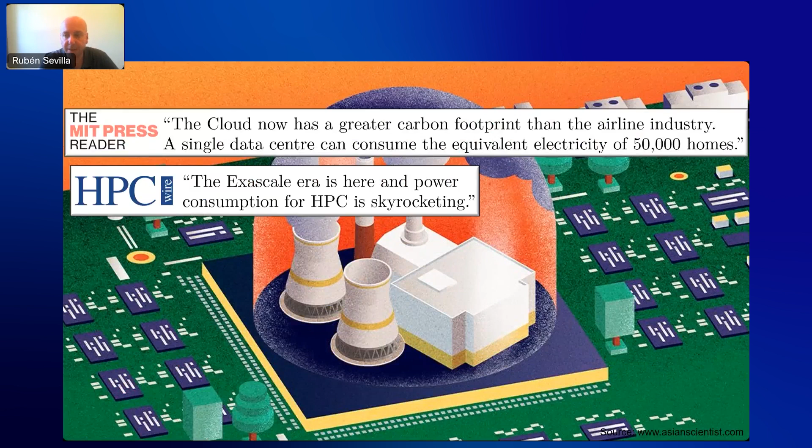Let me start by talking a little bit about the carbon footprint of engineering simulations. There is an increased concern about not just the cloud, but the general use of HPC facilities and its implication in terms of carbon emissions. There are plenty of news stories about this, but I'm going to talk just a few seconds about the last one, on the bottom right.

This is a study made by astronomers who quantified the carbon footprint associated with research activities. What they came up with is this graph showing that offices and the use of large facilities like observatories is surprisingly low. Flights are on top, and there's increasing criticism of organizing too many conferences and traveling to too many places to do research. But actually, by far the most contributing aspect of research is the use of supercomputers.

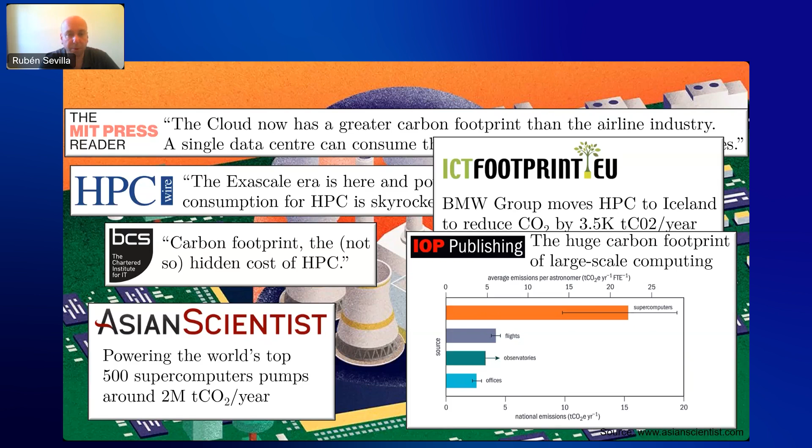If I bring it back to our research, which is focused on using computational fluid dynamics for aircraft design, let's look at this graph representing schematically the flight envelope. To cover that, taking a conservative approach, you would normally run 200 simulations to cover the whole flight envelope. Each of these runs traditionally would use on the order of 100 million elements and take 12 hours using 512 CPU processors. That's just a rough estimate.

It's a rough estimate because 200 runs is really conservative. This is at the very early stages of design. When you look into a geometry, you would naturally go to 1,000 simulations, and this is if we're talking about civilian aircraft. When you go to military aircraft, this number could easily go to 10,000 simulations.

So if we quantify, being conservative, 200 runs with this number of elements using this computing architecture, that equates to 1.7 tons of carbon emissions to perform these simulations. To put it in a different figure, that's equivalent to 15 megawatt-hours, or almost 10,000 kilometers in a passenger car.

And if the situation is not bad enough looking at these numbers, when you read the famous CFD vision report by NASA, one of the statements is that in 2030 we expect simulations with 20 billion elements to be commonplace. So if you do these numbers again, to perform 200 runs we're talking about 150 tons of carbon emission, equivalent to going 20 times around the world in a passenger car.

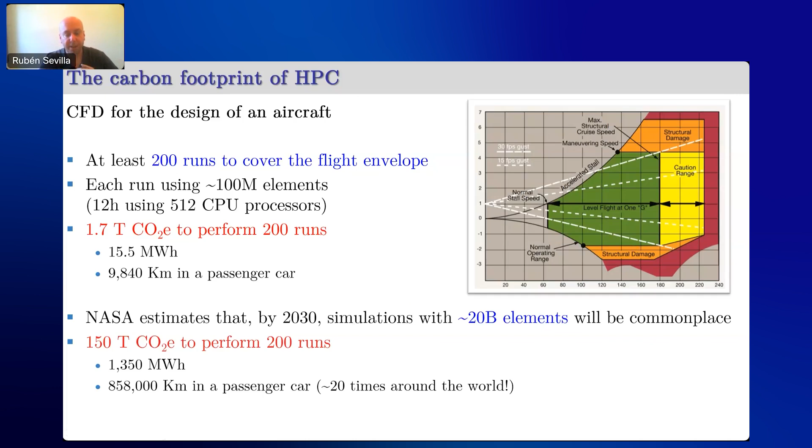That gives you an idea of the cost of simulations. One reason for this high cost and environmental impact of using HPC is the way things are done in many industries, aerospace in particular, because they need to perform parametric analysis. For a given geometry, they run many cases, varying angle of attack, Mach number. They don't want to do meshes for each case, so they end up using a fixed mesh approach, meshing with almost uniform spacing around the aerodynamic object, just so they can run all simulations with the same mesh without needing human intervention, which is the most time-consuming part.

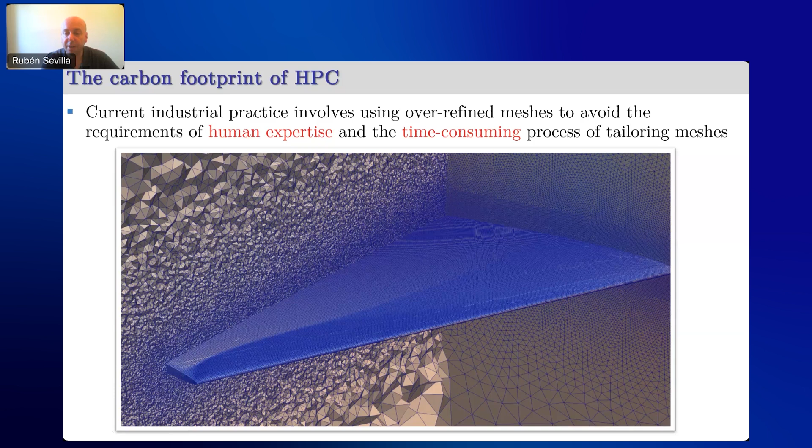Ideally, for different configurations, different Mach numbers and angles of attack, you would use meshes tailored for that simulation, making efficient use of computational resources. But at the moment they don't do it because it requires intensive human intervention, and that's the most expensive part for them, the time of a human.

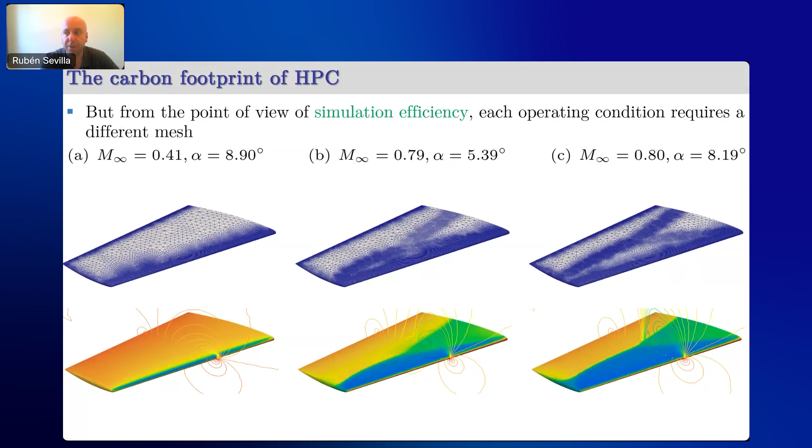So the idea of our research, and this is the outline of the talk, is to try to predict with neural networks what would be the near optimal spacing. We're not going to be too ambitious and call it optimal - I don't think we can call it optimal, but we can call it near optimal. It's going to be a very good mesh to start with for a new simulation, only refining what is needed.

Let me start with this part, then I'll present the second part, how we extend all of that for transient problems - thinking on higher order methods and degree adaptation using neural networks. These will be the two main blocks.

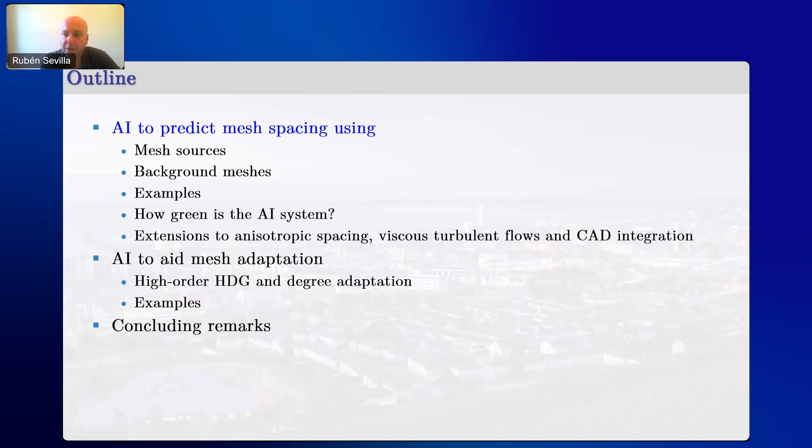So let's go for the first one. This is the typical design cycle. You have operating conditions and a given geometry, and if you want to do things efficiently, you spend a lot of time defining your spacing function. After that, you generate your mesh, perform your simulation, and assess the accuracy of your solution. If it's suitable accuracy, you finish. If not, you need to go redefine your spacing function and generate the mesh again.

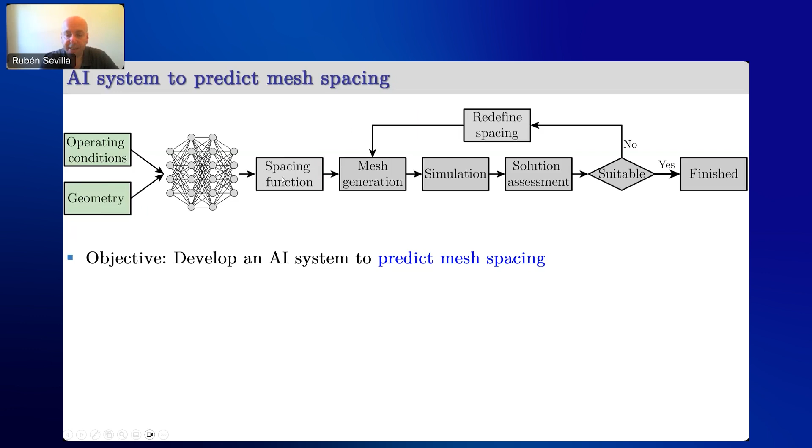Our idea is simply to insert in the middle here a neural network that learns from existing data and is able to predict the spacing function so it's no longer a bottleneck in terms of time and human hours invested in this process. Hopefully what we're aiming to achieve is also to reduce the number of iterations in this cycle.

So basically we aim to produce a mesh that's good enough to obtain the accuracy you need. We're aiming to increase the speed of automation, accelerate mesh-independent studies, overall with the aim of speeding up a design process, and we're also thinking about reducing the carbon footprint of current simulations in the industry.

And finally, as you probably know, mesh generation and preparation of models for simulation is normally said to be the bottleneck in the whole simulation pipeline. But despite that, there's a lot more investment and a lot more people working on the development of solvers and new methodologies for solving partial differential equations, and very few people dedicated to mesh generation aspects, geometric defeaturing, cleaning, and so on.

So basically what we're aiming to do here is to embed into this artificial intelligence system some of the previous knowledge of experts who have been generating meshes for particular simulations. All this data at the moment is really not used.

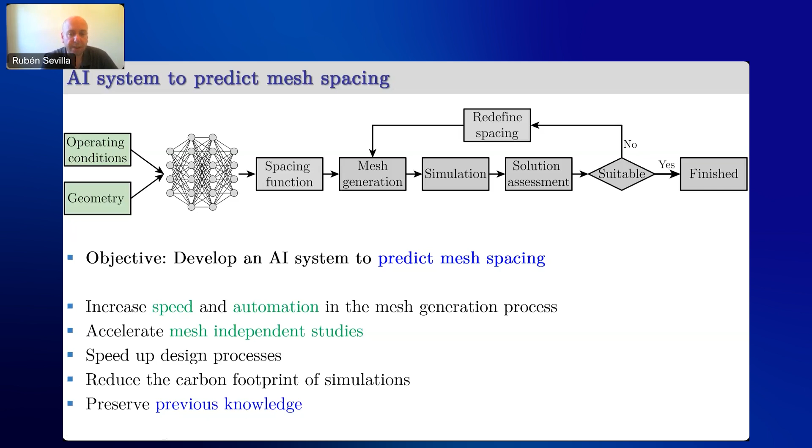So the first thing I'd like to cover is, if we are aiming to predict the spacing, how is the spacing normally defined? There are two ways, traditionally. They are not disjoint, so they could be used together.

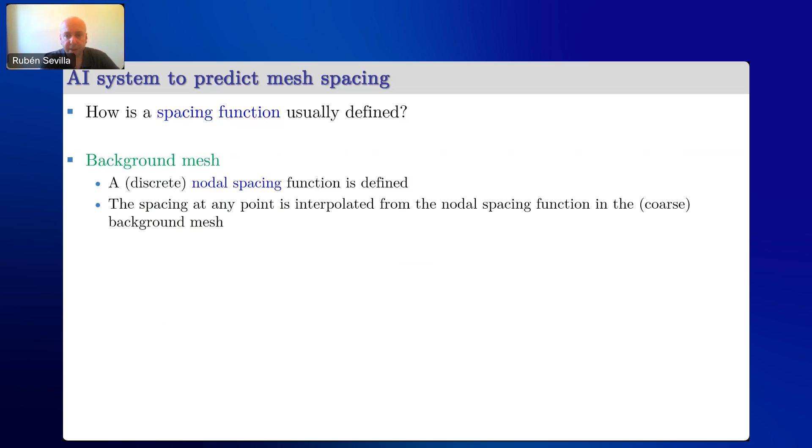The first one is we could use a background mesh, which is a way to define a discrete nodal spacing function. We create a very coarse mesh. This mesh is completely automatic. It's not refined everywhere, it could be uniform, could be structured, could be anything. Then we define a function that gives you a nodal value at each node of this coarse background mesh.

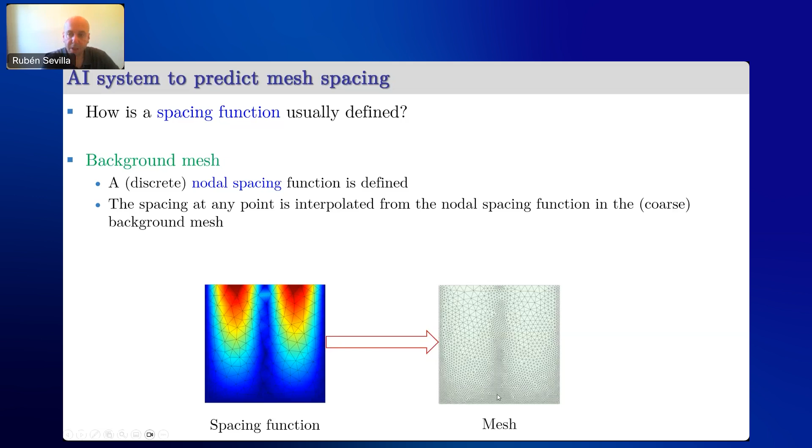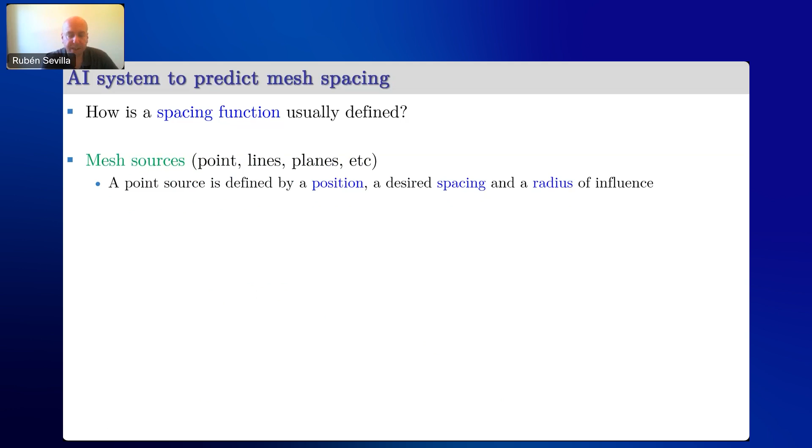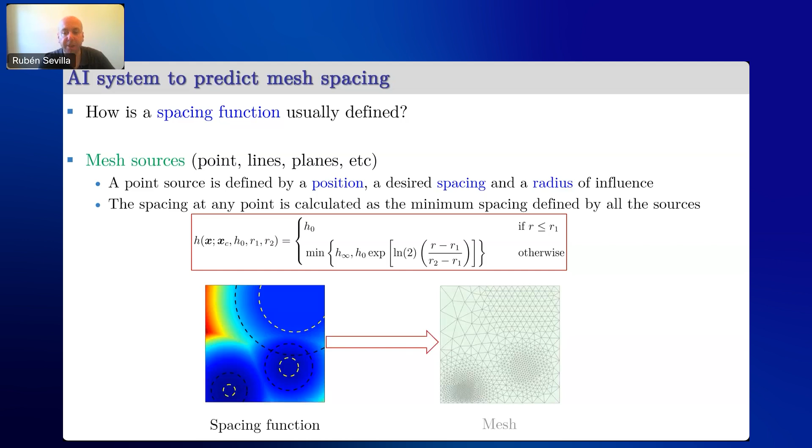So this is all very good, but the problem is that handling mesh sources, or a background mesh, in 3 dimensions, and specifying the spacing at every location, is time consuming. This is where, at the moment, there is a lot of investment of human hours.

Imagine this case with mesh sources: you need an expert engineer taking decisions on where to place the sources, what spacing to use, what radius of influence to use, etc. This is why companies are heavily relying on expensive simulations with a fixed grid that captures all the features, with the unnecessary computational cost.

So I'm going to present two systems, two neural networks that we've designed. The first one predicts the spacing on a background mesh, and the second predicts the sources. I'll take the first one.

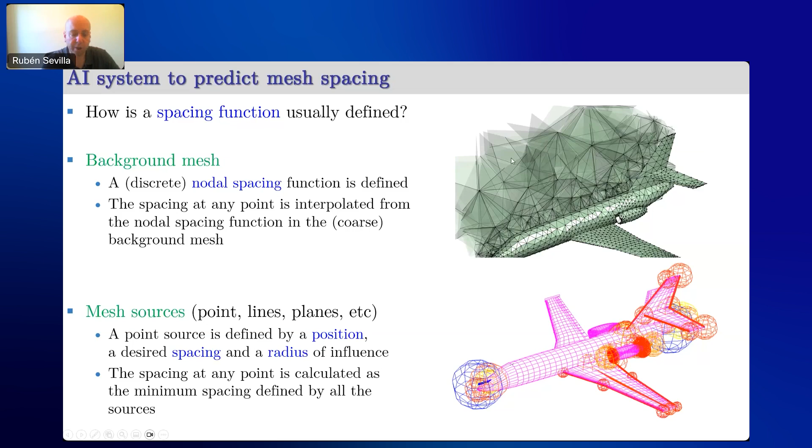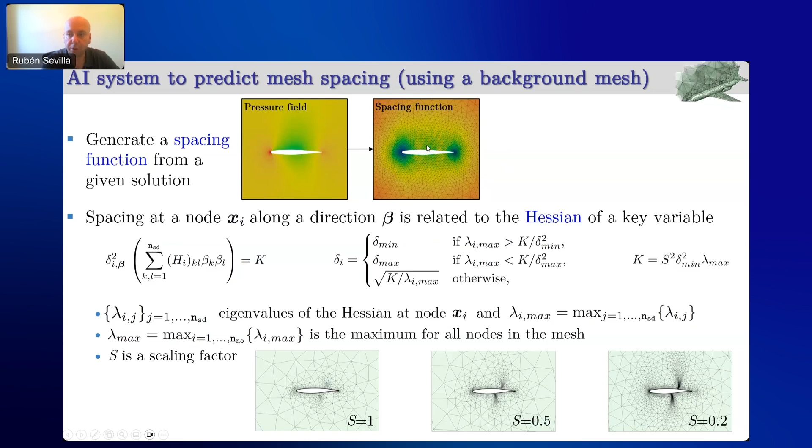We'll repeat the process for all the training cases that we have available, all the different pressure fields that you can see here. It could be for different flow conditions. It could be for different geometries. We've done both, and I will share examples on both.

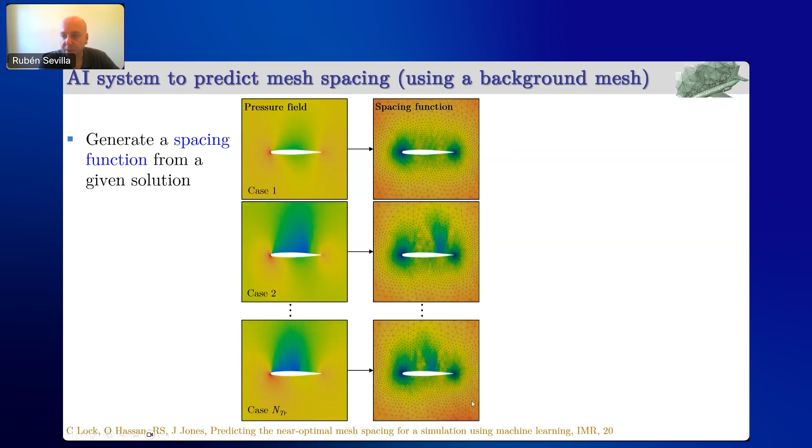After translating this to a spacing function, if we want to use a traditional feed-forward neural network, we need the output layer to have a constant number of neurons. So in this case, this is not still there yet because these simulations could have been done in different meshes. So what we do is we define a background mesh, which is a coarse mesh with no specific refinement anywhere, and we are going to interpolate the spacing function for each case into the common background mesh.

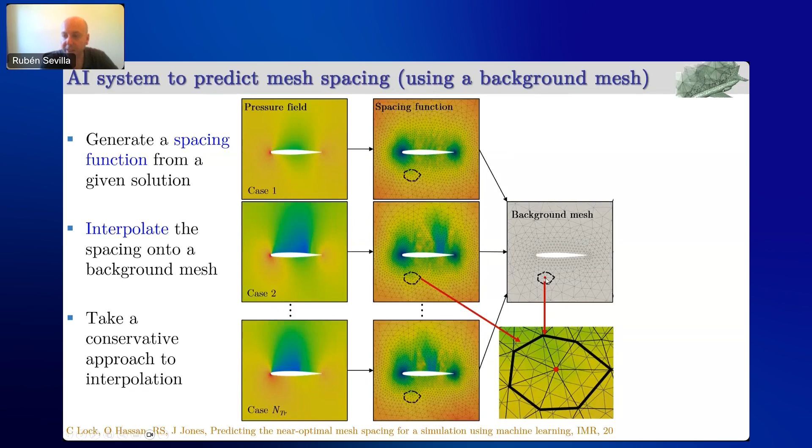And the interpolation we do is basically what we call a conservative interpolation. Basically, you take a point on the background mesh, you take the patch of elements surrounding this node, and then you project this patch into one of the simulation meshes, one of the computational meshes you have. And you take the minimum spacing of all the nodes inside this patch, and you associate it to the node of the background mesh. This basically allows you to represent the spacing in this common mesh.

That's interpolated the spacing for each one of the cases. One of the things that is worth noticing here is that you see how the spacing is actually smooth. So for example, all this area of small spacing in here, which is necessary to capture the shock, is actually expanded a little bit. And this actually is acting as a safety factor. This allows you to make sure that when you do the predictions, you are not going to miss any feature.

And at the same time, we're using a background mesh, which is coarse. This is going to reduce the number of outputs required in the neural network. So it's going to speed up the training.

So the architecture is really simple. It's a feed-forward neural network. The input layer is basically the flow conditions, so Mach number and angle of attack, and geometric parameters. And the outputs are the spacing at each one of the nodes of your background mesh.

Needless to say that if you are considering different geometries, you will need a mesh morphing algorithm in order to morph the background mesh into each one of the configurations. This, I believe, is quite standard.

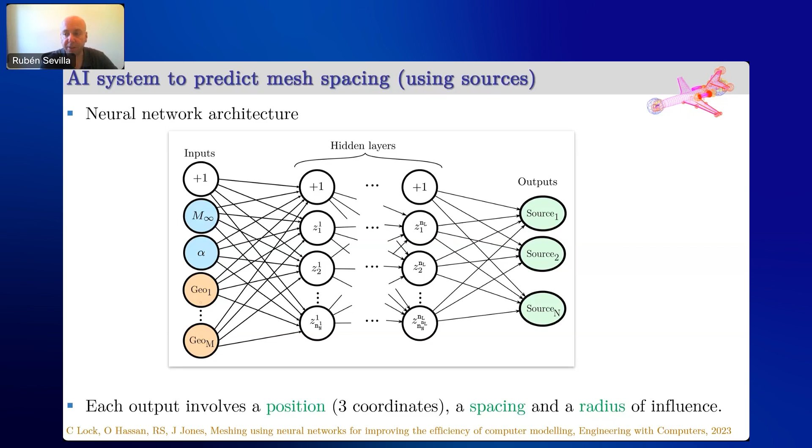Now, once you have it, the architecture is fairly simple. The input layer is the same, flow conditions and geometric configurations, and the output is now the characteristics of each one of the sources. Notice that per source, you have 3 coordinates in 3D, 1 spacing, and 1 radius of influence, so that's 5 outputs multiplied by the number of sources.

Okay, now how does this work? Once you've trained the neural network, it takes unseen cases, whether flow conditions or geometry, and I use my trained neural network to give you the set of sources. You could directly use this set of sources in the mesh generator, but we know by construction that there will be many sources that are redundant.

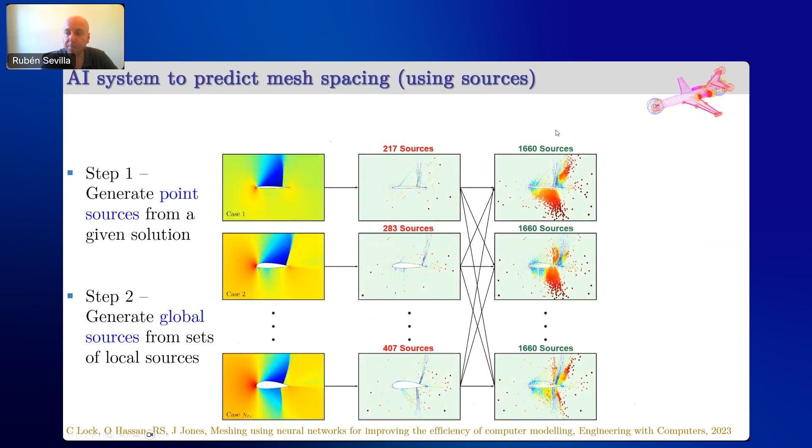If I take you back to this case, you could see that all these cases had only a few hundred sources required per case, but in order to make it consistent I took it up to 1,600. So one thing we do, only to speed up the mesh generator, is remove the redundant sources — any source that can be removed without altering the spacing. After that, you're ready to generate your mesh and perform your simulation without having to manually insert all these sources. So let me show you an example.

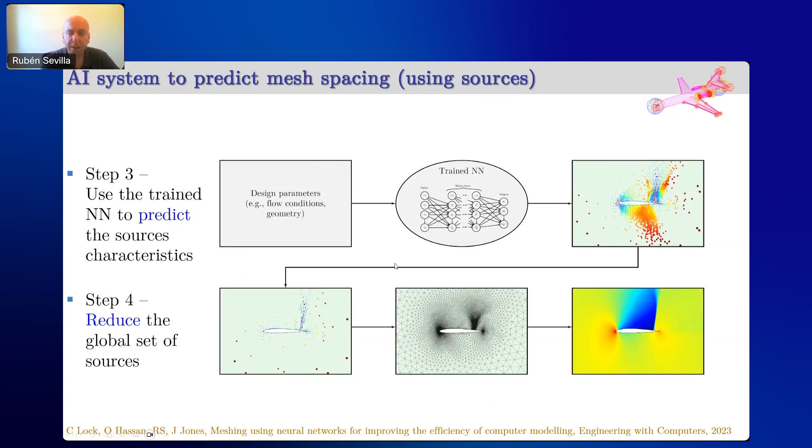I'm going to take this 3-dimensional wing with variable flow conditions. This is parameterized with a Mach number going from 0.3 to 0.9, covering the subsonic and transonic regime. The angle of attack ranges from 0 to 12, with an inviscid solution for the moment, inviscid compressible Euler equations.

We're going to increase the number of training cases from 10 to 160, and use 100 test cases unseen by the network to test accuracy. We have no idea what number of hidden layers or neurons to use, so we're going to do a brute force grid search, running hidden layers from 1 to 6 and neurons from 25 to 250.

I'm going to show you results for the two neural network architectures. One uses sources — in this case, of the order of 20,000 point sources. Remember, you need to multiply this by 5 to know the number of outputs of your neural network, since each source has 3 coordinates, a spacing, and a radius. So we're talking about a neural network with 100,000 outputs here.

With the background mesh, the size is substantially reduced, so this is promising — we use a mesh with only 14,000 nodes, and you only need to predict 1 scalar per node of the mesh, which is just the spacing in the background mesh.

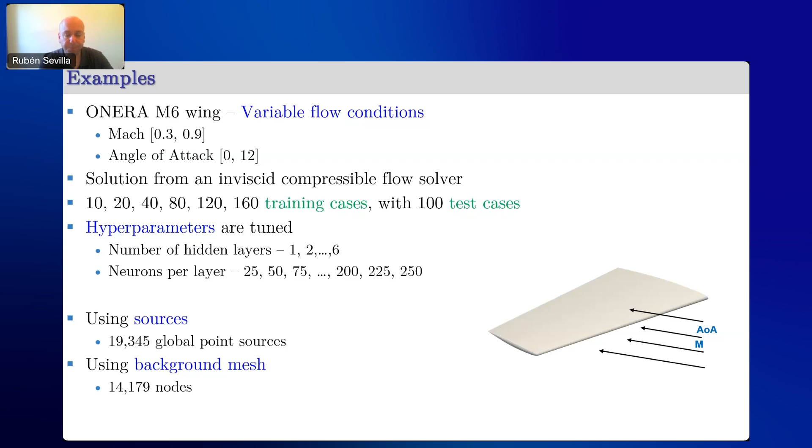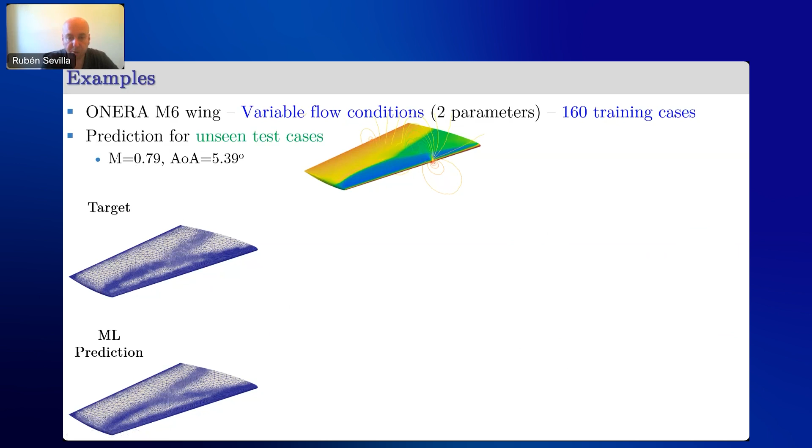But then if we try to quantify, basically what we are going to do is go to every point in your mesh, and measure the ratio between the predicted spacing and the target spacing.

And we are using quite a lot of training cases, I would say, 160 training cases for this. Now, several comments here. Number one, 5% of the target, when we're talking about mesh generation, is really unnecessary, okay?

When you think that a mesh generator, when you ask for a given spacing, imagine that you ask for a spacing of 1, it will give you a spacing of 1.2, 1.3 easily, because sometimes you have no other way of closing the spacing, or it will give you 0.9, 0.8, 0.7. What is the threshold that normally you need to consider as acceptable when you ask for a mesh? Well, if you're asking for a spacing of 1, you need to accept up to square root of 2 normally. This is the magic number that mesh generators use.

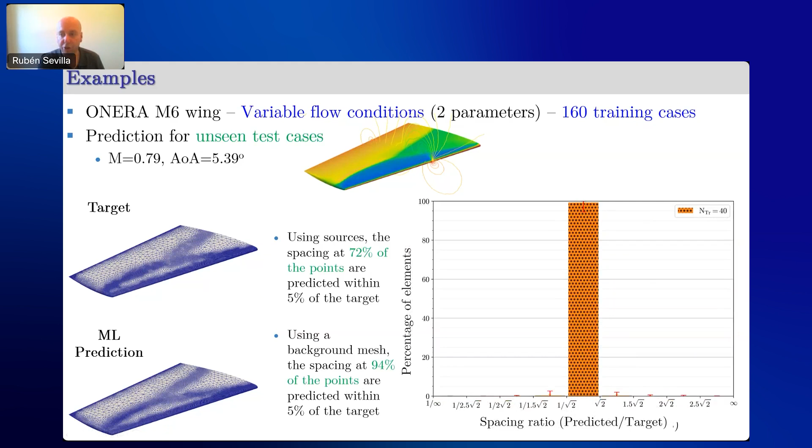Now, another thing we did is to actually use the meshes that are predicted by the neural network in order to perform a simulation and see how accurate the results are.

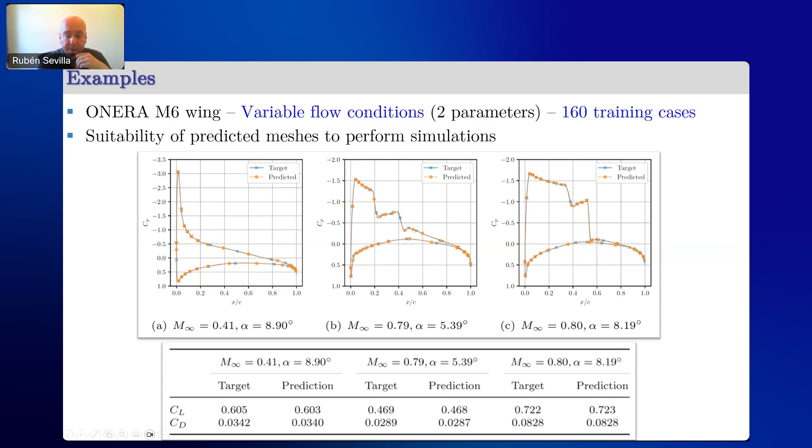Right, more complicated examples include geometry. We've been talking so far about flow conditions, only 2 parameters. When you start considering variable geometry, then the number of parameters really goes high. So here I'm going to consider this full aircraft configuration.

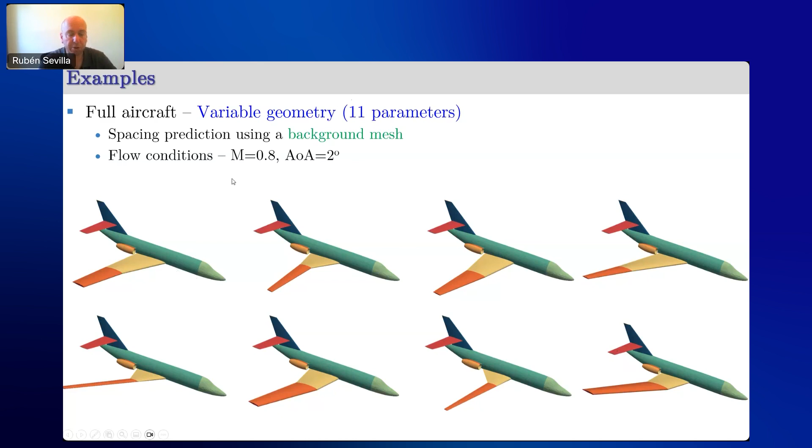With 11 geometric parameters, this figure basically gives you an idea of what variation is induced by these geometric parameters. I'm going to consider transonic flow conditions, so all the solutions are going to exhibit shocks.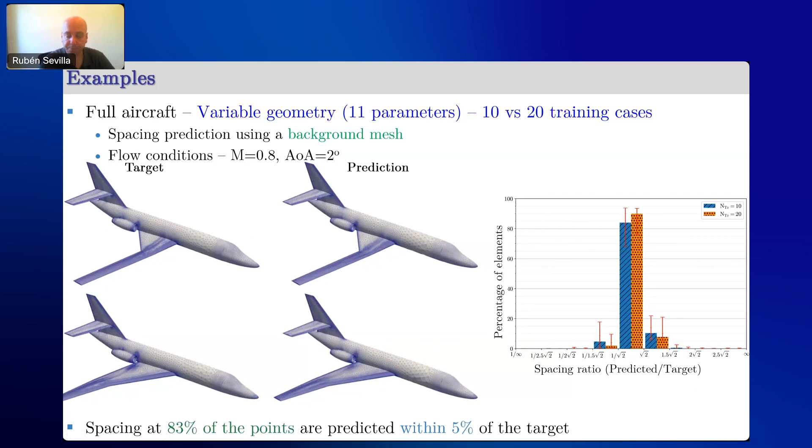Now let me talk about part of the title, the green AI part. Our objective was to increase efficiency compared to current industrial practice, which is to use a fixed mesh and run all simulations on the same mesh to avoid having a human decide where to refine for each case.

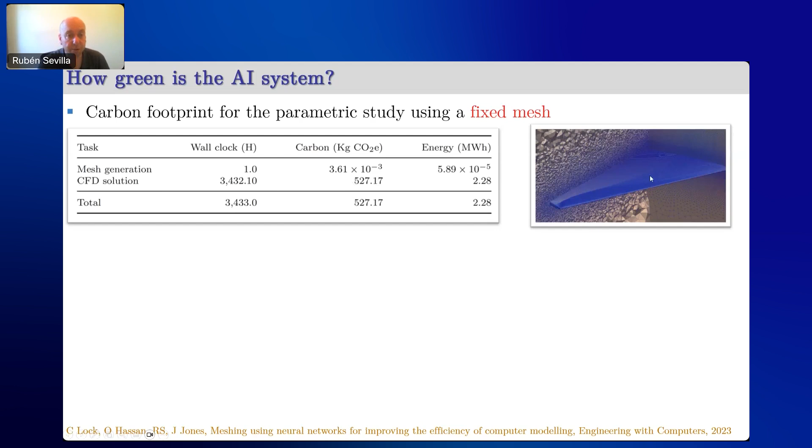With this approach, in terms of mesh generation you spend nothing, just 1 hour to generate the mesh, which had on the order of 40 million elements, but you do that once. The problem is that the CFD simulations you perform become very expensive, over 3,000 hours, with half a ton of carbon emissions to perform this parametric study on this geometry.

Now if we quantify our approach, you'll observe that in mesh generation you spend more time, obviously, because for each simulation, for each flow condition, you need to generate a new mesh. This goes up to 24 hours for mesh generation. But the big advantage is that your simulations become way cheaper, because you have a mesh tailored for that geometry, reducing time and carbon emissions substantially. Now the question is, can we call this green AI?

It's certainly AI because we are using neural networks, and the answer is yes. The definition of green AI is that you improve and reduce the computational resources and carbon emissions caused by HPC use, if you account for training and tuning. This is something that is very often hidden, and I don't think we should hide this information. We should include it in this table.

Here I'm including all the time we spend training, but also tuning, meaning running different numbers of neurons, different numbers of layers, and even repeating the training to remove the influence of the initialization of the weights of the neural network. All of that is included. I'm not surprised that the time of tuning and training becomes dominant, and I think this is why in many cases this time is hidden, because if you're not careful, it becomes the dominant cost of your process.

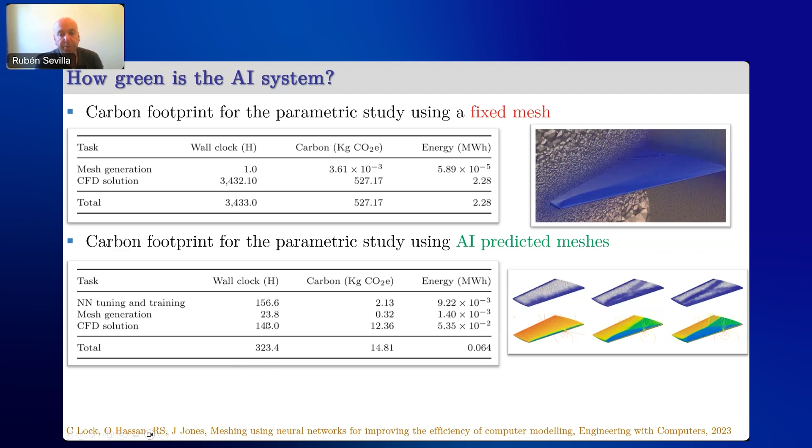The good news is that the resources needed for training our neural networks are relatively small, so the carbon emissions associated with tuning and training are very low. By reducing the CFD hours substantially, which use parallel processing and so on, we reduce the carbon footprint substantially. The overall conclusion is that we can reduce carbon emissions compared to current industrial practice by a factor of 35, which is quite impressive in my opinion.

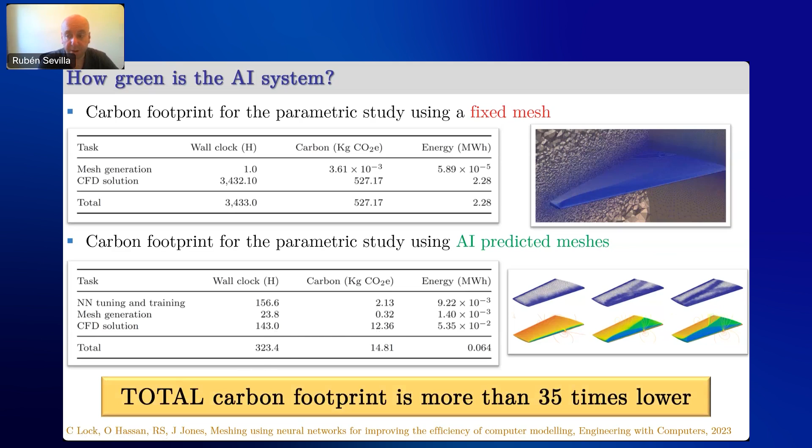Now, the next thing we've done is try to extend this to anisotropic spacing. So far I've been showing you isotropic spacing; we wanted to extend it to anisotropic, to capture directionality in a more efficient manner.

Because when you look at these solutions, there are clearly directions along the shock where the pressure is really not changing in this direction, but it's changing massively in the transversal direction. So the optimal use of your discretization will be to stretch the elements along the shock in order to minimize the number of elements whilst capturing the high gradients.

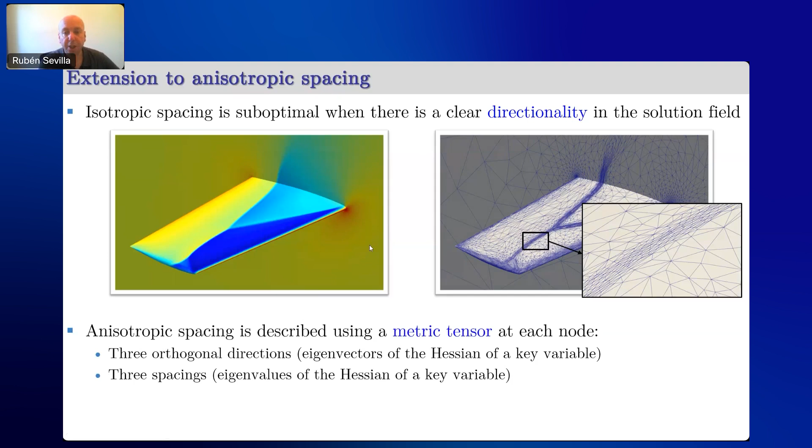So the idea is to extend our approach to predict a metric tensor, because this is how you describe anisotropic spacing. You need 3 orthogonal directions, and you need 3 spacings in each one of these directions. So the strategy we followed: you could say if you need to predict 3 directions, these are 3 vectors with 3 components, so 3 by 3 is 9 in total, plus 3 spacings, that's a total of 12 outputs that you need to predict per point.

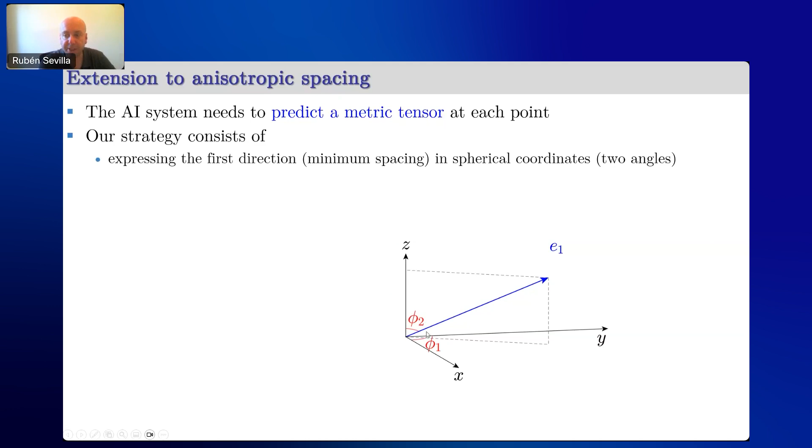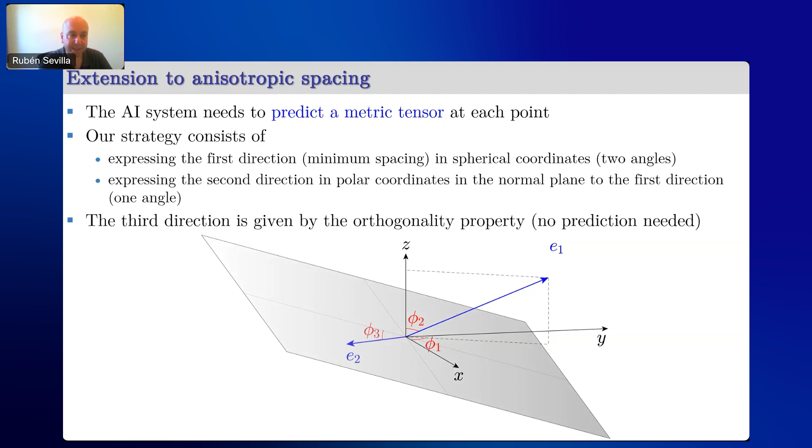But it's actually not true, you can do a bit better. What we do is look at the first direction, the one of minimum spacing, and express it in spherical coordinates, which means we need only 2 angles to represent that direction. Then we use orthogonality. We know the second direction is going to be in an orthogonal plane to vector E1, the first direction, so it's going to be somewhere in that plane. Again we don't need the components of the vector, we can use polar coordinates on this perpendicular plane. And the third direction, you don't need to predict at all, because if it has to be orthogonal to these 2 vectors, it's already given. So effectively, you only need to predict 3 angles and 3 spacings in order to enhance our system to predict anisotropy.

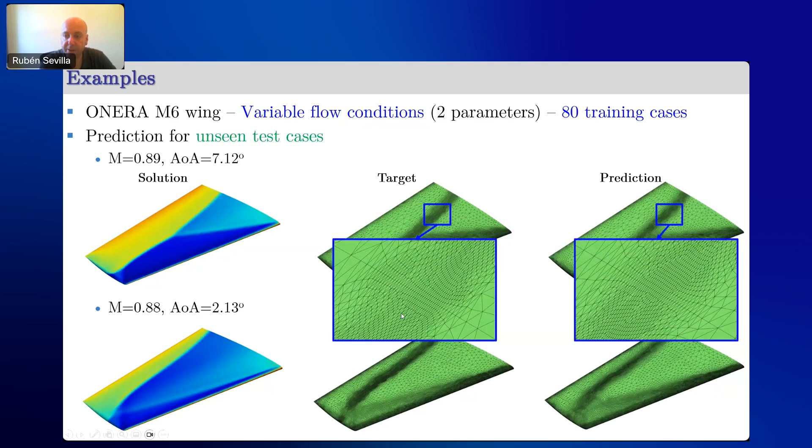So you're going to need more cases. We have 2 unseen cases: the solution on the left, the center is the target mesh, and the right is the prediction, which visually does a good job. If you zoom in, you can see it's really stretched, okay, so you are producing an anisotropic spacing here.

A similar graph to quantify the accuracy. With 80 training cases, we are almost predicting all the nodes perfectly. This is the first spacing, the spacing in the direction where it is minimum, referred to the shock. Then the second and third spacing are all well above 90, almost reaching 100%.

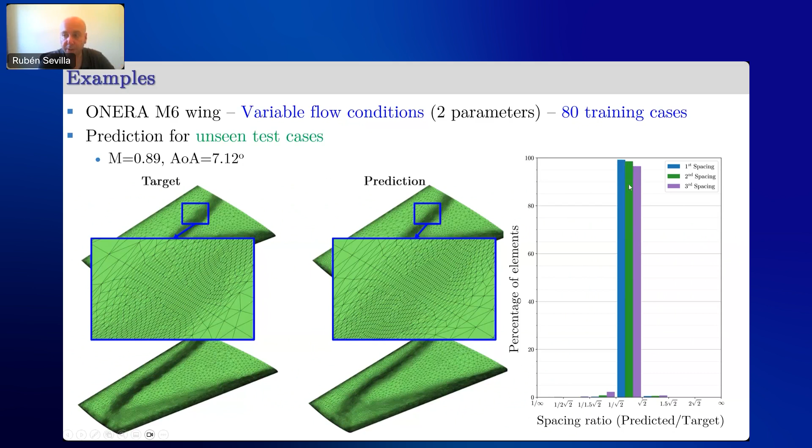For a more complicated case, going back to the full aircraft configuration with 11 geometric parameters and only using 40 training cases. I'm showing results with the minimum number of training cases possible, what accuracy you can achieve. Here you can see again that we're well above 90 for the most important spacing. We consider the first one the most important because it's linked to how accurately you can capture the shock, and it's also doing reasonably well in the other directions.

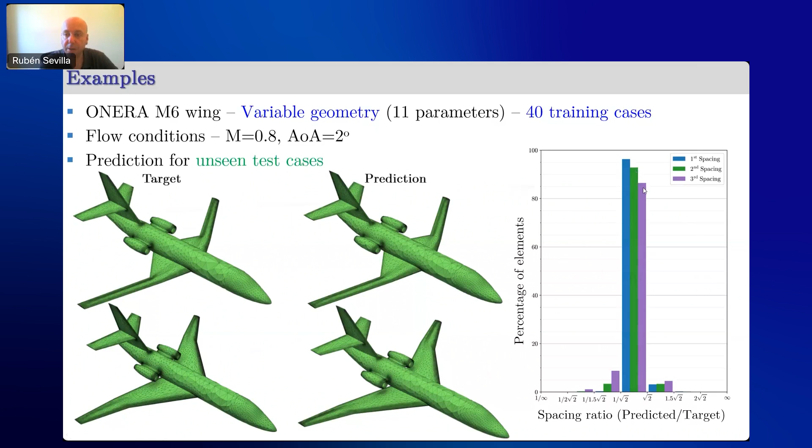Now, all of that I'm going to move on from, because all of that was done for inviscid flows. We've played a little bit with viscous and turbulent flows, but in 2 dimensions. This is basically the work of an MSc student who spent 1 year with us. We found a few challenges, I'm not going to lie, and I'm going to present them here along with the solutions we found. But all the challenges are really induced by the use of highly stretched elements in computations related to turbulent and viscous flows, so boundary layers, shear layers, and so on.

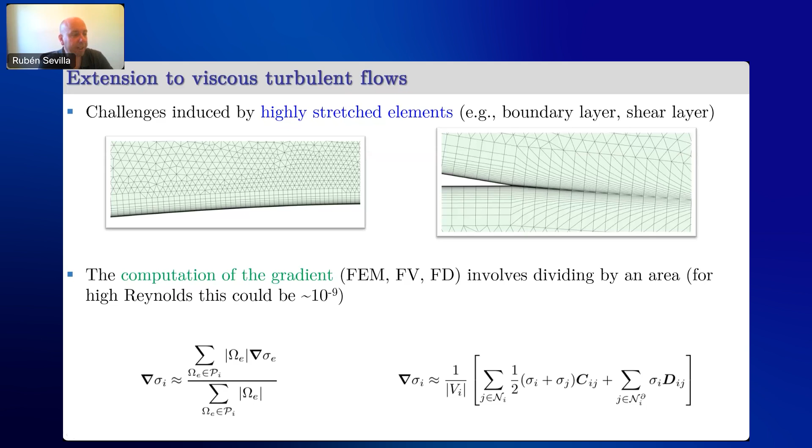All the challenges come from the fact that we need to compute the Hessian in order to compute the spacing function we're trying to predict, which means we need to reconstruct gradients. When you look at the computation of a gradient, it could be done in different ways, a finite element approach, a finite volume, but no matter what you do, you're going to end up dividing by the area of an element in 2 dimensions. At these areas, on the boundary layer or shear layers, you're going to be handling elements with an area on the order of 10 to the minus 9. So any minor issue, any minor inaccuracy in your solution is going to give you trouble. So take one case, the typical case on the NASA website, RAE2822, transonic turbulent flow.

And you look at the pressure distribution. Overall, from a certain distance, everything looks okay, no major issues in here. But then if you start zooming, and you need to zoom a lot, this is a zoom near the lower surface, very close to the leading edge. And when I say you need to zoom a lot, we're talking about 10 to the minus 3 as the scale you see in this figure, and the chord length of the wing is 1.

What we saw with our code and simulations is small oscillations in the last layer of elements. These are the contours of the pressure. Initially, we thought it could be something wrong with our code. We downloaded the solution from the NASA website, and we saw even bigger oscillations. So basically this is telling me that the solution within the boundary layer is not fully converged. You cannot fully converge it. You get tiny, tiny, tiny oscillations which don't have an effect on lift and drag. You don't see anything in there. You get good answers, good comparison with experimental values. This is what everybody's reporting. These oscillations are really, really tiny, I insist, even on the scale.

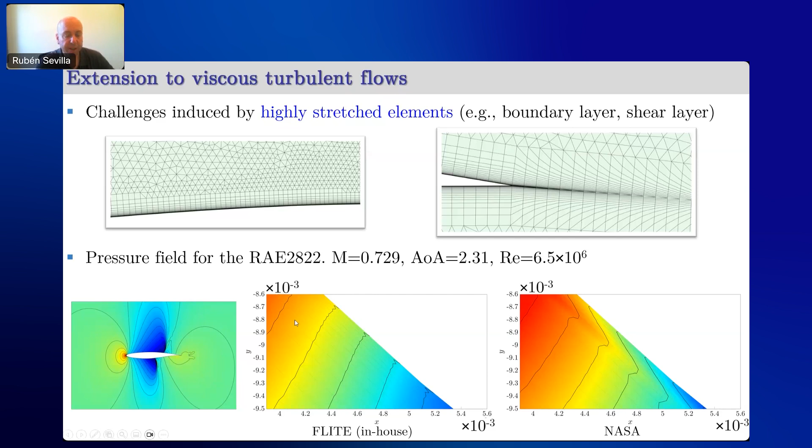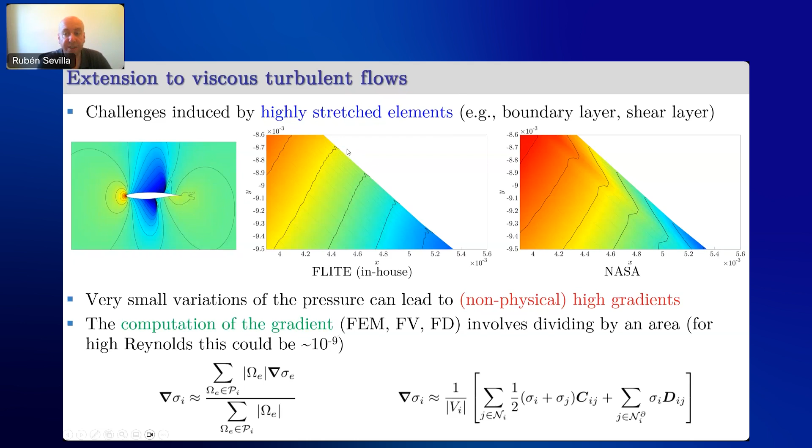But the problem is that these oscillations, which are so tiny, when you use a reconstruction procedure at the boundary layer, you are dividing by a factor of 10 to the minus 9, and all of that explodes. Basically, what is going to happen is the spacing is going to be dictated by this small non-physical oscillation. Let me show you first what would happen if you don't do anything, if you just take the spacing as given by this solution. Then the spacing function you get is something like that: all the refinement in the boundary layer, nothing capturing the shocks. This is because your gradient reconstruction is basically biasing everything towards the boundary layer.

So what we've done is a simple smoothing. We use the fact that we have a structured mesh in the boundary layer region, so we take the nodes that follow a normal direction and we do a smoothing, basically a fitting with a cubic spline. With that, we can remove this very local effect, and all of a sudden you will have spacing that really reflects the variation of your solution. So you are removing this high influence near the boundary layer.

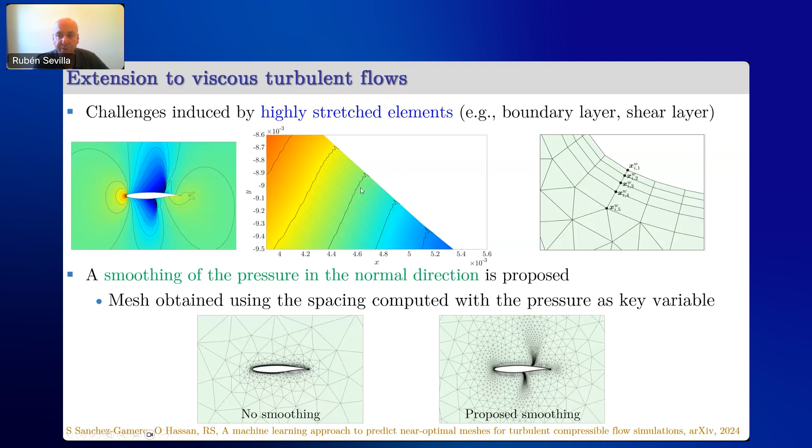The other thing you need to be careful about is to not use just one key variable. We've been using pressure only for inviscid simulations, but if you use pressure only for viscous ones, you're going to miss features, especially on the wakes. So we consider either pressure and density, or pressure and Mach. We ended up using pressure and Mach because you get a better capture of the wake. Basically, you need to combine more than one key variable in order to compute the spacing.

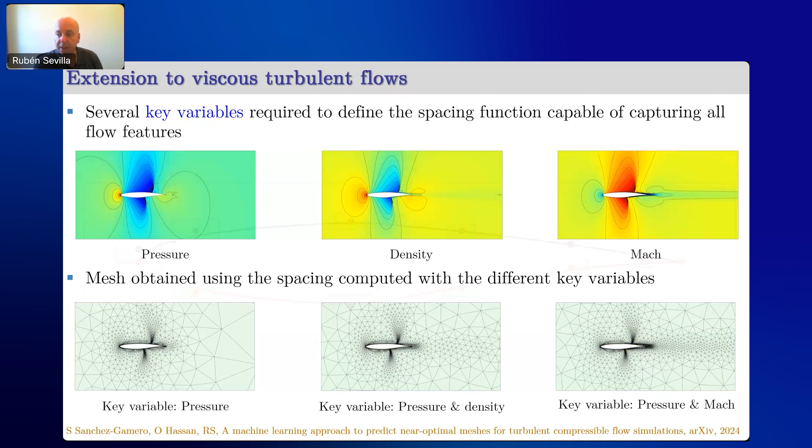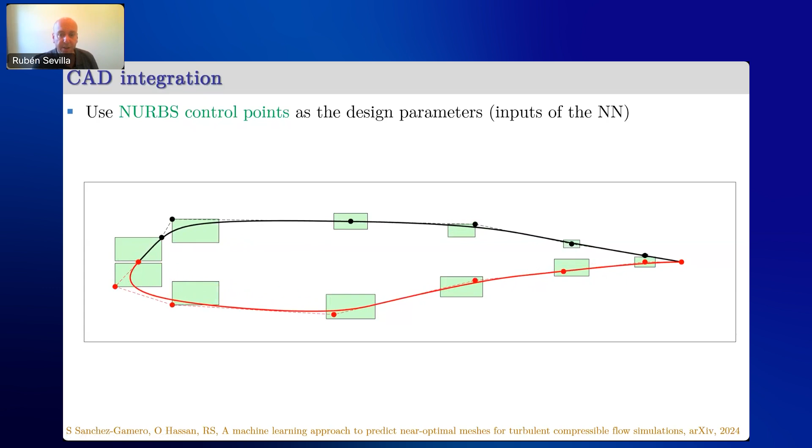And the last thing we wanted to do, and we played a little bit with this student, is to link the geometry to the mesh. So I'm going to show you one example only in 2D, predicting the spacing required for different geometric configurations, where the geometry is parameterized with NURBS control points. You can see the control points of the shape, and they are allowed to move within each one of these rectangles. You can see the high variability in the solution that you get for the geometry. So predicting the mesh for each case is going to be challenging because the solution is going to be quite different for each geometry.

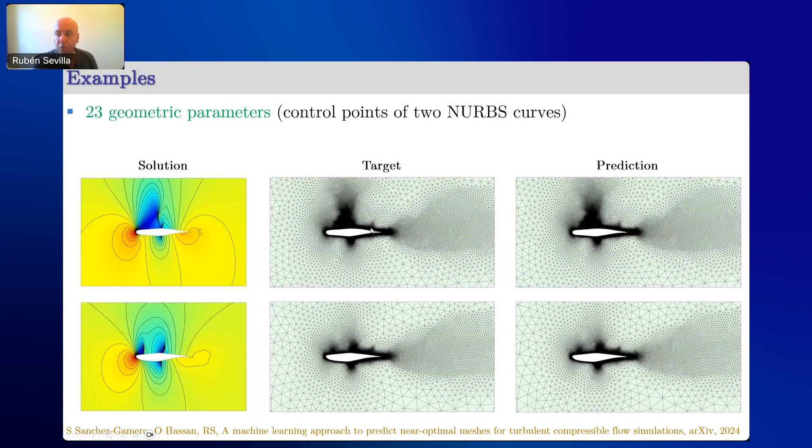This is the example for transonic turbulent flow conditions, 23 geometric parameters, so it's really a high-dimensional problem. The target mesh is on the center and predicted mesh is on the right, but as usual it's better to quantify it with histograms. For obvious reasons, we need a high number of cases because the dimensionality of the problem is really high, 23. So if you want to hit higher percentages, up to 90%, we're talking about 640 training cases. And when you think about it, 640 training cases for a problem in 23 dimensions is not that high when you put it in perspective.

We also assess the accuracy in terms of how good this mesh is to perform a simulation. So we use the predicted meshes to perform simulations, and we compare lift and drag, and we observe again very good accuracy. So the meshes are really suitable to perform simulations, and you are trying to bypass the need to do repeated remeshing.

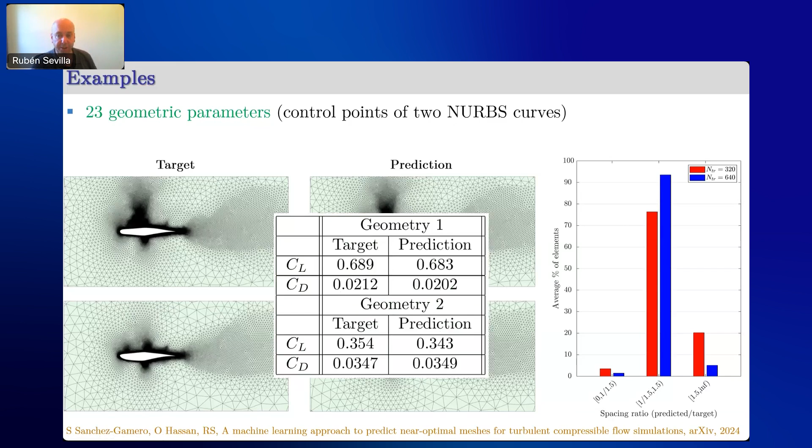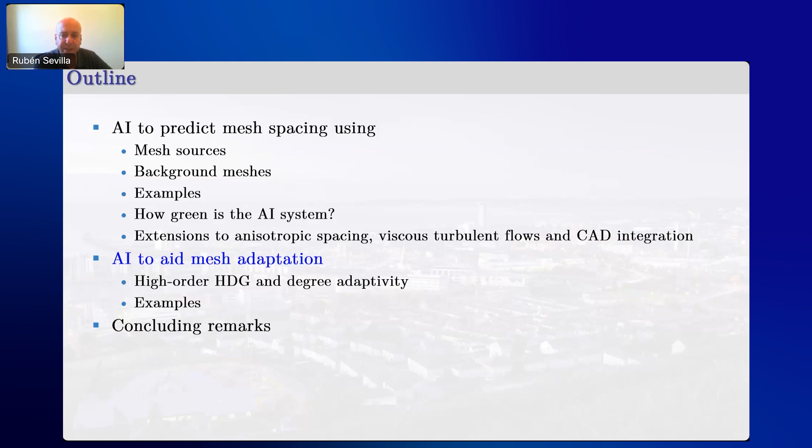This takes me to the last part. Everything I showed so far was steady problems, and we're also interested in solving transient problems for obvious reasons. In this case, we're aiming to use higher order methods.

It's pretty well established nowadays that for transient problems, higher order methods are really beneficial because of the low dispersion and low dissipation errors associated with these methods. There are plenty of higher order methods available. Our preferred method is hybridizable discontinuous Galerkin.

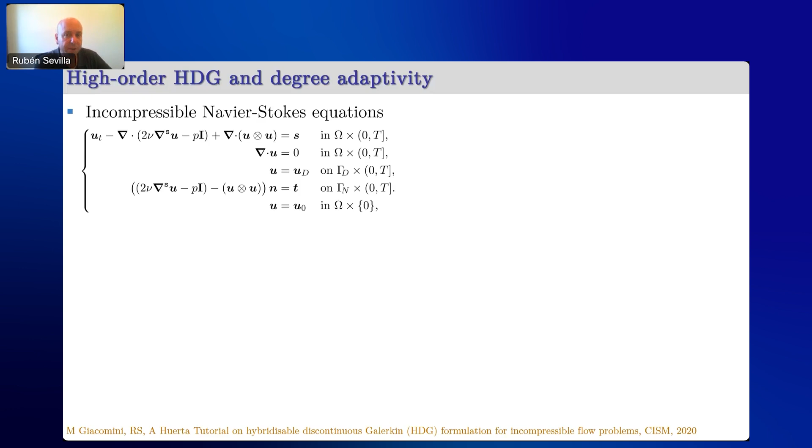One reason we like this method is that, as in many other DG methods, you take the momentum equation and split it into two first-order equations, introducing what's called a mixed variable L, which is the gradient of the solution, or the symmetric gradient, if you like. These two variables, the velocity and its gradient, become independent variables.

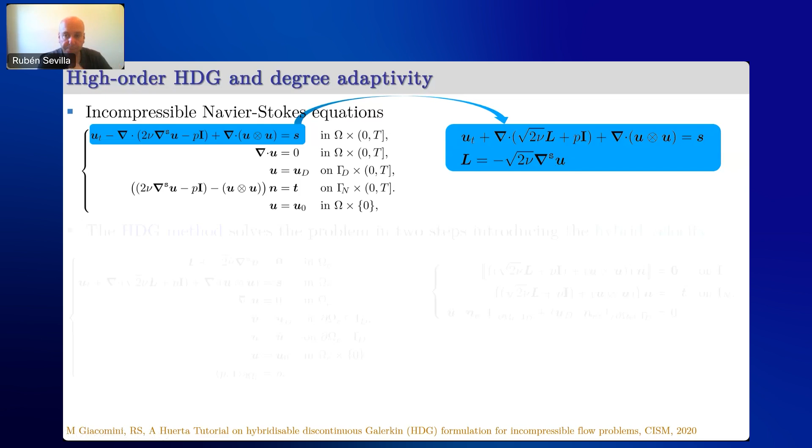In principle, you may think you're increasing the computational cost. But in HDG, you actually solve the problem in two stages. You write, in each element, a local problem which contains the momentum equation, the equation for the mixed variable, and the divergence-free condition—we're talking about incompressible flows now.

We also introduce what's called the hybrid velocity, so I'm increasing the number of unknowns massively here. My initial unknowns were velocity and pressure. I'm using a mixed formulation, so I'm adding the gradient as an extra unknown, and I'm also adding the hybrid velocity, which is the velocity at the faces of the elements. All of these are independent variables you need to solve for.

And that's all within each element. On top of that, you need a way of communicating between elements. Since you allow a discontinuous solution, you need what we call the transmission condition: you impose continuity of the velocity and continuity of the fluxes in the normal direction across internal faces. This might look like a very complicated problem.

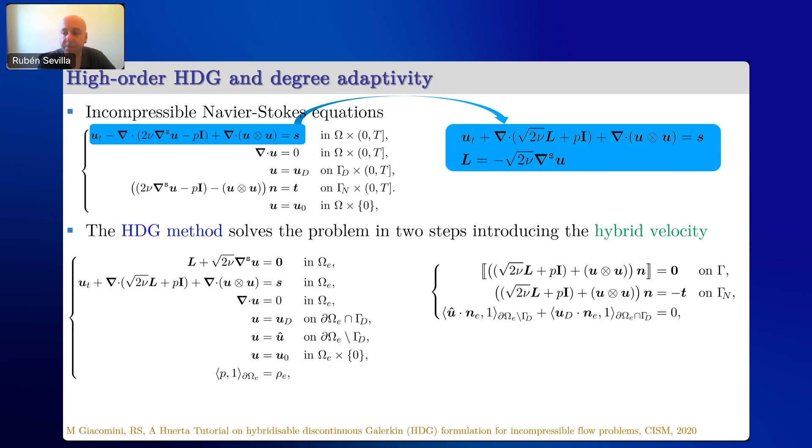The trick is that we solve the problem in two stages, as I mentioned. First, the global problem, which only involves velocity on the faces of the elements. So on the interface between elements, you've got degrees of freedom for velocity, and only one value of pressure per element—the mean value of the pressure at the center of the element.

This leads to the global coupled system of equations, which is the costly part of HDG. But after that, you go element by element, and you can compute the velocity for whatever order you decided to use, the pressure for whatever order you decided to use, and the velocity gradient.

I insist that this is an element-by-element problem, meaning the solution in one element is completely independent of the others. So all of that can be done in parallel in a trivial manner.

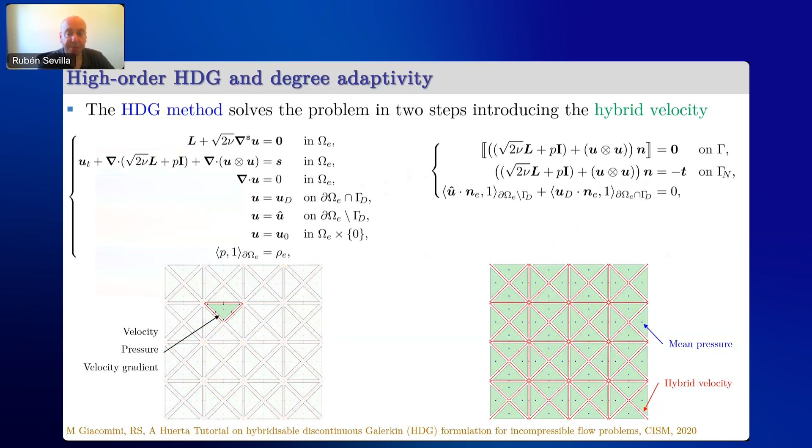The reason we like HDG is that having the velocity and its gradient as independent variables, which converge optimally, both at the same rate of k plus 1, where k is the order, allows you to build what we call a superconvergent velocity.

Here, for this Couette flow test case with an analytical solution, you have convergence rates for different degrees, each color being a different degree. The x-axis is the spacing, the y-axis is the norm of the error. As you refine the mesh, the errors decrease, and importantly, they decrease at the same rate for velocity and its gradient. This allows you to build the superconvergent velocity, U star, which converges faster—at a rate of k plus 2.

The idea is that if you have two approximations of the velocity, and one converges faster than the other, you can build a very cheap error indicator, and use it to perform degree adaptivity. That's our strategy for solving transient problems.

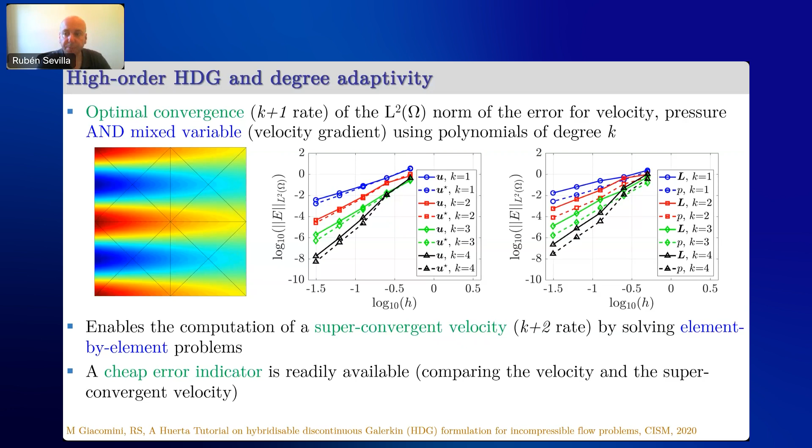Now, an illustration of how the degree adaptivity works for a steady problem, before I take you to the actual transient problem of interest, is the Couette flow.

Remember that all of that is cheap, because you only need to solve element-by-element problems to build the superconvergent solution. So the dominant cost is really the solution of the global problem, not the post-process to obtain the superconvergent velocity and the error indicator.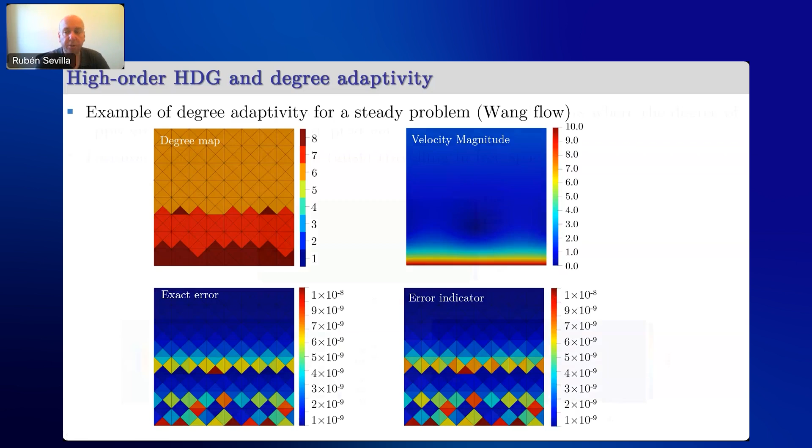So I'm going to apply this idea now for a transient problem. I'm going to put a perturbation of the velocity in a rectangular domain, free stream air, and this perturbation is going to travel from left to right in the free stream, following the free stream velocity.

On the bottom left, you have the degree adaptivity. Top center, you have the reference solution with high order everywhere. On the bottom right, you can see, corresponding to the adaptivity on the bottom left, what the degree is.

If you run it and look at what happens, basically we lose accuracy on the degree adaptive solution. In short, here is what is happening.

You take a snapshot of the solution, compute the superconvergent velocity, estimate the error, and adapt the degree. But then this perturbation of the velocity is going to travel from one position to another, so we could have a perturbation traveling to a place in the mesh that is not suitable to capture it.

The mesh is not refined, the degree is not high enough, and you can see it on the right. You have high degree in this area, but at the next time step the solution is going to travel to the right, to a place where you're using P1, and you're going to dissipate that.

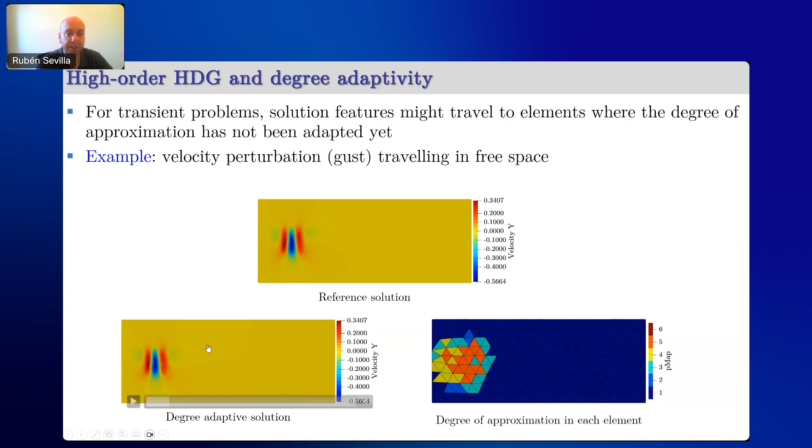Now, what is a stupid solution to that? Something some people do is: advance the solution in time, perform the adaptivity, then go back in time and advance the solution again. You repeat the time step, and in that way you make sure the areas where the solution is going to travel have already been subjected to degree adaptivity—you've increased the degree so the elements can support the solution with accuracy when it arrives.

And this is what you see in this simulation: reference in the center, on the left normal adaptivity losing the solution, on the right repeating each time step and guaranteeing accuracy. But as you can obviously think, this is not efficient—you are doubling the cost of each simulation.

So our idea here is to train a neural network to predict the solution at time n+1. We are going to collect data from simulations, and basically we are interested in solving this problem I'm showing you—let me go back—solving it with perturbations of the velocity that are parametric.

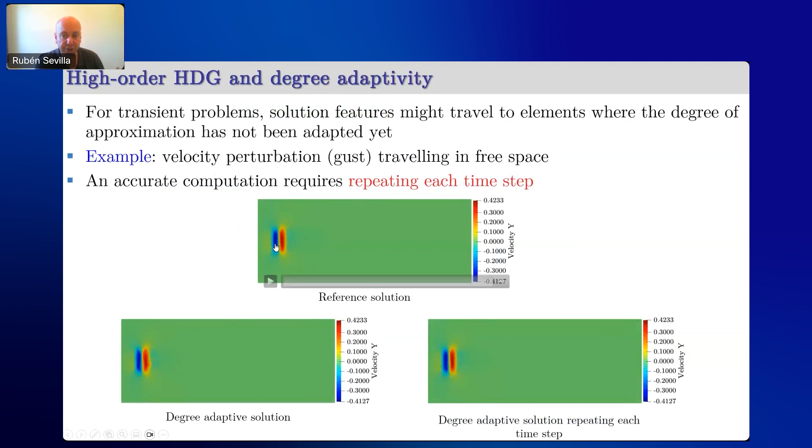So we have changes in width of this perturbation, changes in intensity, and we could even change the angle. In that scenario, we're going to run a few simulations and collect data, then train a neural network that takes, at a given point in the mesh, surrounding points—top, bottom, left, and right—in the spirit of a finite difference stencil. We take the information at those points at time n as input to the neural network and predict the velocity at the next time step.

All of that, we are going to do it from data available from simulations, as I said. These points are not mesh nodes. This is important because we're using unstructured meshes, so the points of this stencil are overimposed into your unstructured mesh.

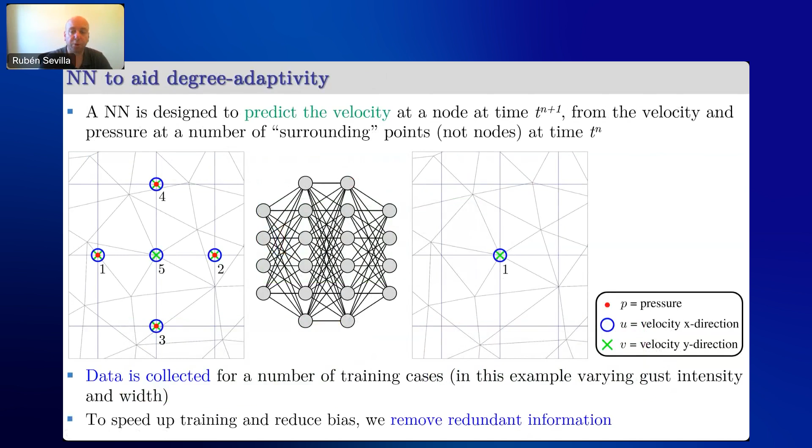And to capture the data, you interpolate your velocity across the unstructured mesh into these supporting points. A technical aspect I think is important: in our simulations, there could be a lot of places where nothing is happening, so the solution is constant. To remove the bias associated to that, we remove the redundant information, to avoid the neural network being biased towards places where the input and output is the same, a constant field.

So I'm going to close with that. I presented two AI systems to predict spacing, one in the context of steady problems. It predicts isotropic and anisotropic spacing, and the meshes have been proved suitable to perform simulations. This process has been proved to reduce computational cost and carbon emissions compared to current industrial practice. The second part of the talk presented this AI system to predict degree adaptivity, to aid a degree adaptivity process for transient flows and avoid the need to repeat time steps in order to guarantee accurate simulations.

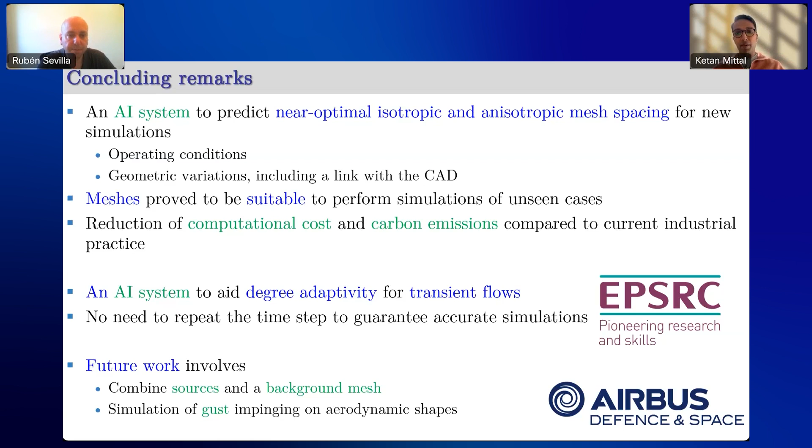For one of your earlier slides, Rubén, where you were showing the hyperparameter study, can you go back to that? I noticed it was interesting. It seemed like for the top right case, where you have the maximum number of neurons and number of layers, the performance drops down for these bottom two plots. Why?

For these two plots, this is the spacing, and this is the radius of influence. I think, to be honest, my feeling is that at some point—this is seen in other problems too—adding so much nonlinearity to a problem that doesn't really have this nonlinearity is actually not helping at all. This is what we see here: it's not just dropping performance, it's the fact that you can add more and more layers but never improve on what you'd get with two layers, really. So going really deep in number of layers isn't helping massively.

Which for us is really good, because that means our training times are really low. And I like that you try to keep the number of inputs to a minimum. We also found in one of our projects that it helps, it makes a big difference — just adding a lot of inputs can increase the strain on these neural networks and significantly impact the performance.

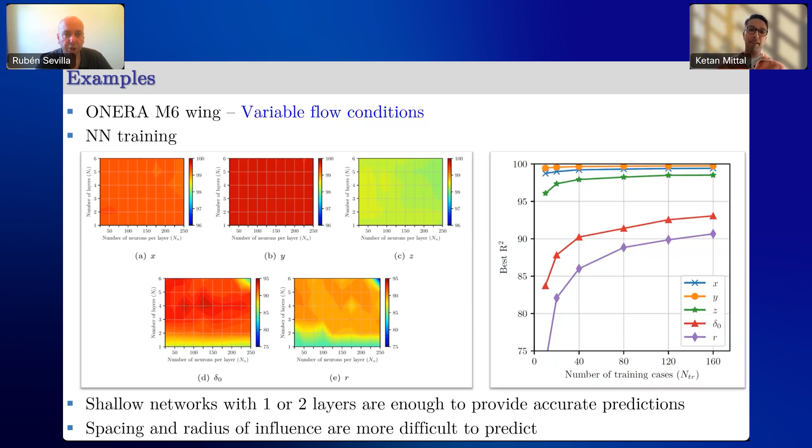Yeah, well, I guess that speaks to the robustness of the approach, perhaps. Well, the thing with the background mesh — we've done some studies, especially with a semester student. We played a little bit with the effect of the background mesh by manually doing different levels of mesh refinement on the background mesh and how this affects the neural network.

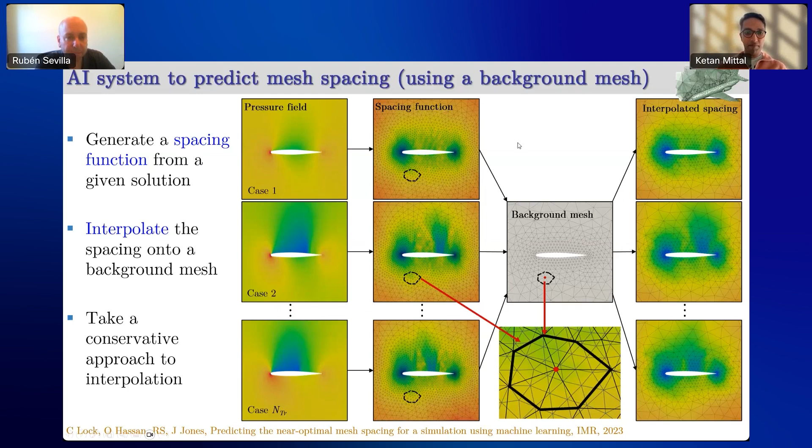I really think this is some great work. Thank you for this talk. Could you go to your second-to-last slide, please? Where you have the slide with the gusts moving through.

I'm wondering about the neural net that's predicting the N+1 state—is it trained on this particular solution, or on different cases? As I mentioned, the objective is...

For the gust, you need to parameterize it, considering intensity, width, and angle of the gust. Then you sample this space—you decide how many cases you want to run accurately to gather data, you gather this data from these simulations, and then use that for unseen cases.

So the gust itself is relatively low dimension, but it's run through a whole simulation and then trained on that. Yes, you need all of that. I think it makes sense already, at least to me.

Only if you're interested in parametric analysis. When you run the gust and have to vary different quantities—intensity, width, and so on—that's when I believe it makes sense to gather data from some cases and exploit it to avoid the extra cost of new simulations.

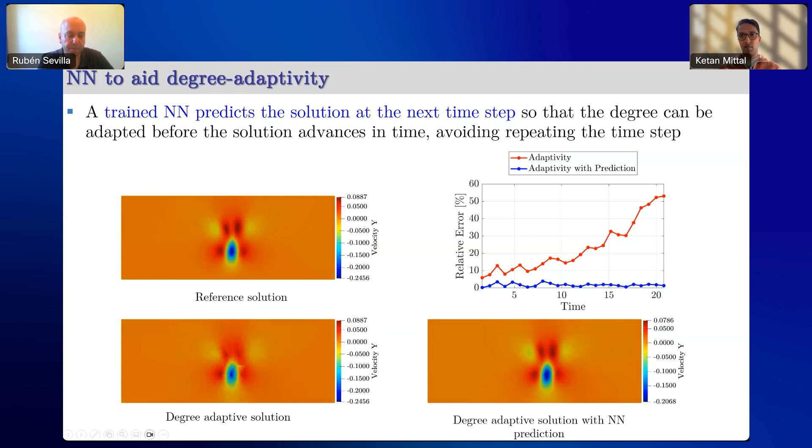Yeah, this is very helpful. This is exactly the sort of thing we're trying to do—parameterize the design space, like you were showing with the NURBS. That's pretty great. As long as you can interpolate well the simulations within that design space, you're in pretty good shape, and your results with such little training data are extremely impressive. Thank you. No, thanks.